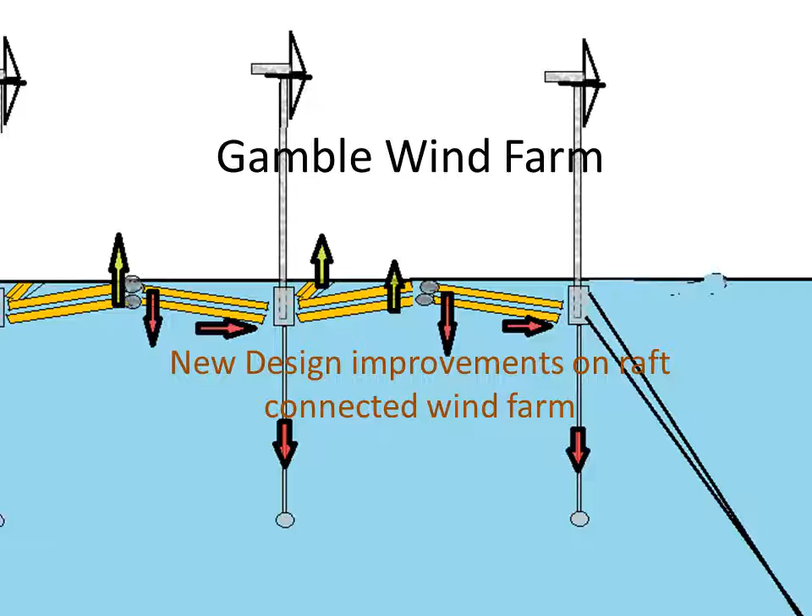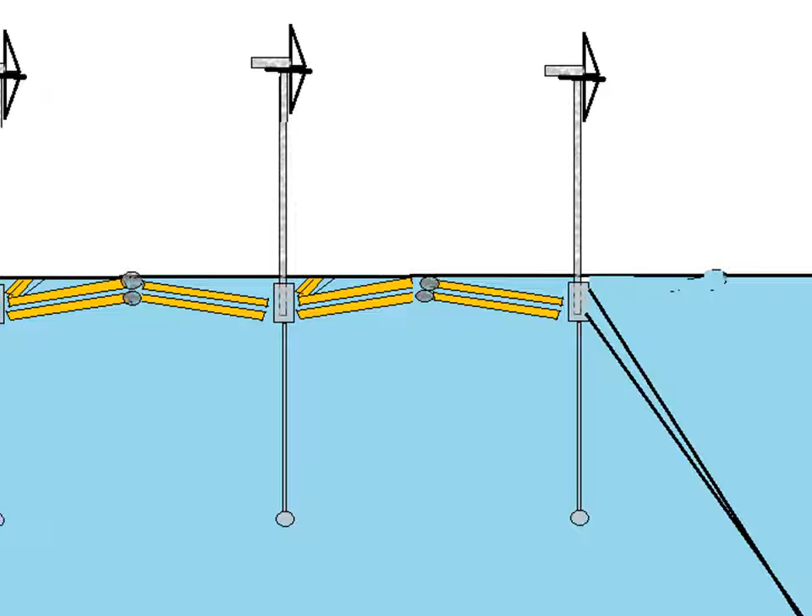Now, what this is based off of is the idea of really elongated buoys, and that's what those yellow bits there are, that are basically able to bend in the middle and in certain parts to move the mechanical shake in different directions. Now, the size of the buoys is based off of calculations I made that were in the last floating wind farm film that was released only about maybe a week ago.

Basically, seawater is 1/6 as heavy as steel, and polystyrene is 1 ton lighter than seawater per cubic meter. So what you have here is the ratio of cubic meters of polystyrene that it would take to equal 1 cubic meter of steel. And I've got this for the theoretical 10 megawatt range of towers, which don't actually exist yet, but I'm looking at the ahead engineering here.

It says that basically the leg joints of this would have to be about 42.25 meters is what I estimated for the length. And so therefore, if you're to get the correct amount of buoyancy that you'd need to the amount of steel for the 10 megawatt range, you would need a buoy that is roughly 42.25 meters long. And there are 6 of these on the design. I could show you later. And 2.25 by 2.25 meters height and width. And that would equal out enough polystyrene with the scheme to actually load this out and make it so that it would equal out in buoyancy.

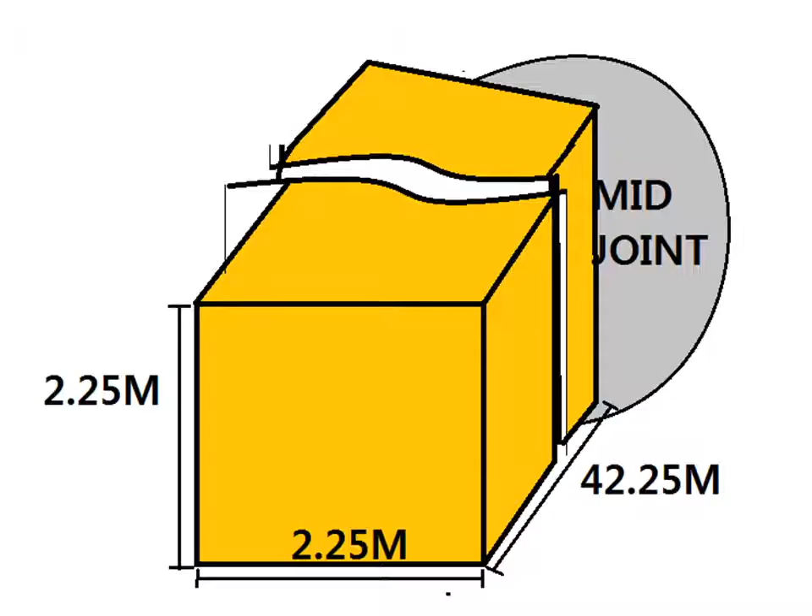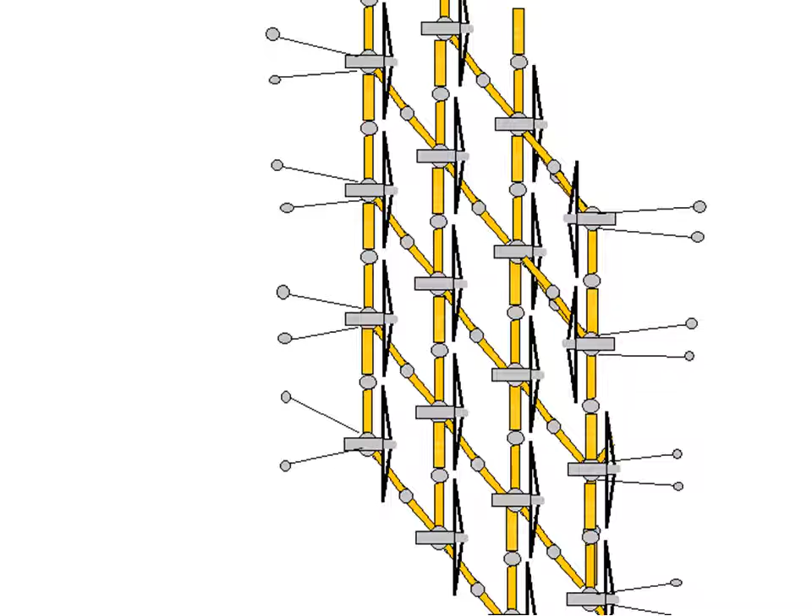This is more or less just to show you how that would look. There's a cut mark in the middle of it. And to give you a close-up view, this isn't everything about the buoys, but this is just giving you an idea of the size that it would take to do 10 megawatts by 10 megawatts. Now this system is a lot like the floating raft system that I was talking about in the last one. I don't have it quite done, I haven't figured out everything mechanically you'd have to do, but this is sort of an overview of how it would look.

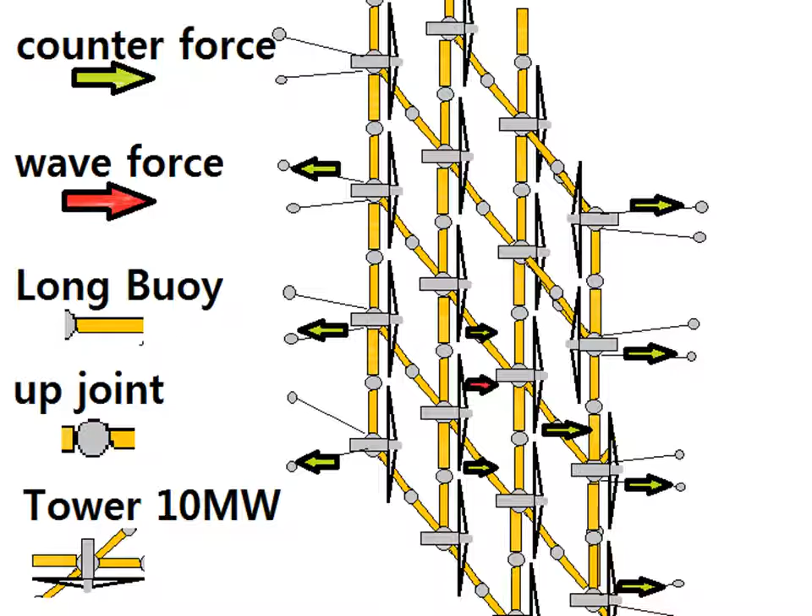Now, the thing about this is that any tension on one part of this tower system is going to try to force the joints down and around, which the joints of the buoy system are already in tension. They're in floating up tension. So basically, anytime the tower moves, it tries to move the buoys, which are already in tension against it. So it's trying to move thousands of pounds or tons instead of free floating. And this is a breakdown of basically the key that I have for this at the moment.

See, this is an example of what I was talking about. Now, if you look at this, I have in red sort of the forces of weight from the towers, and in green the counterforce of the buoys. And the buoys, once they go away from the towers, want to lean up. So therefore, to have those buoys go down on both sides would mean that you're countering the buoyancy force of the buoys. Now, you'll still need masts in this case, and you'll need them on the outside to make an absolute limit for how far the buoys can wander.

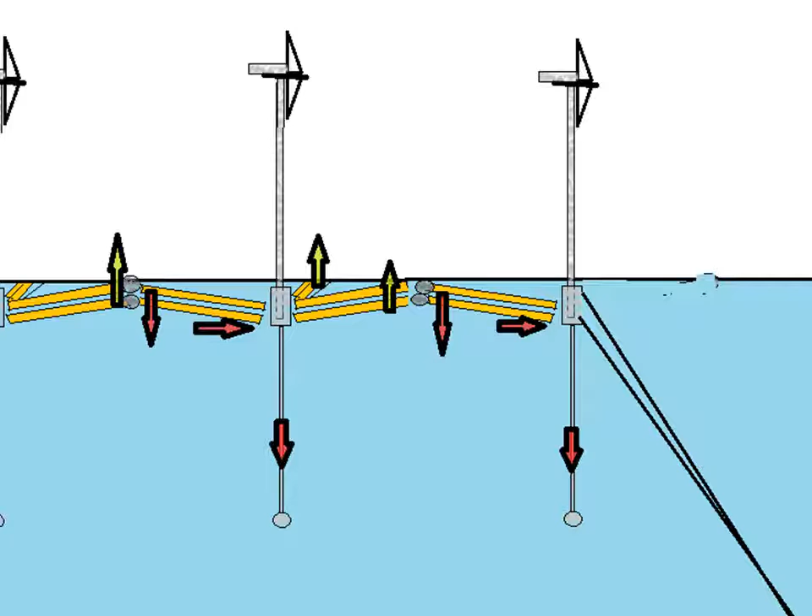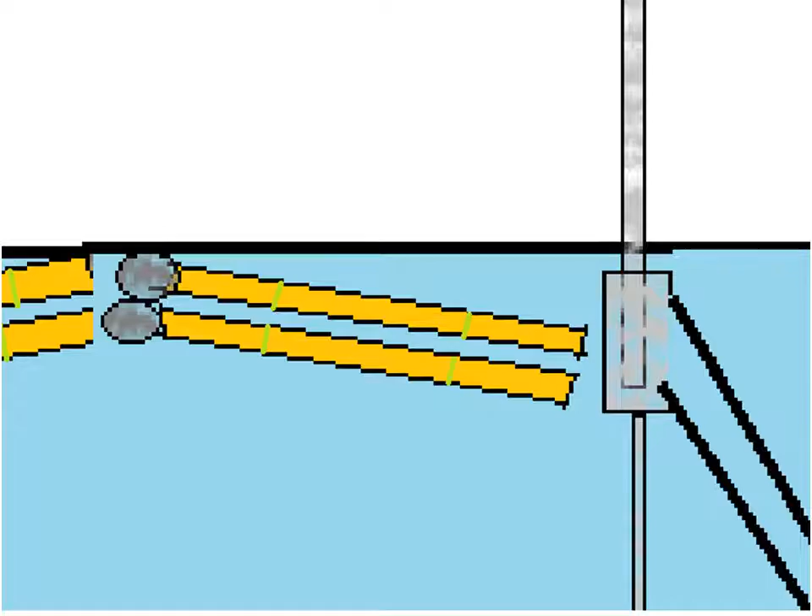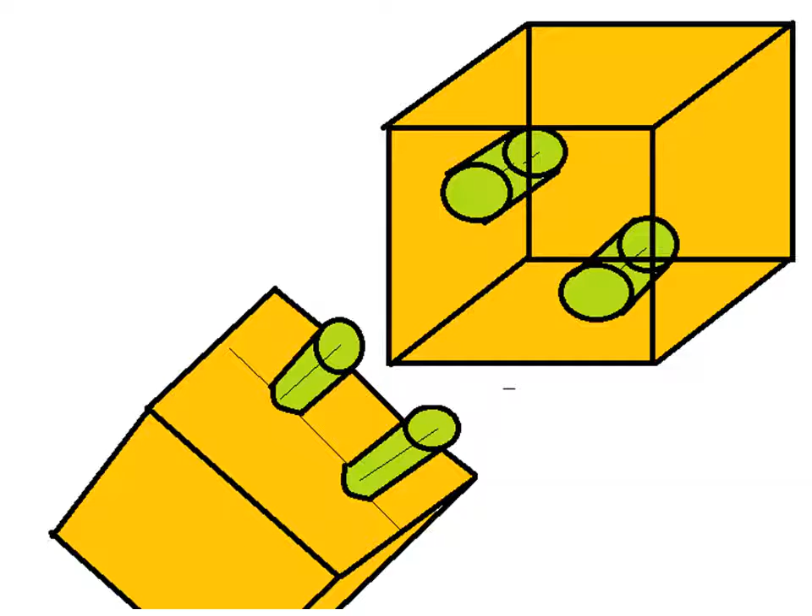But on top of that, the more important part, I think, is that you could use these buoys as sort of a mechanical shock absorber if you have it set up right. These little green marks here are really more supposed to represent the idea of there being a stoppage in the buoy system where it becomes more of a flow mechanics machine. Like you just have pegs that connect them so they can move slightly. The idea is more like you mechanically create a space where you're using water flow in and out of, and this different type of joint you could make. None of these have really been tested yet. These are all just kind of ideas at this point.

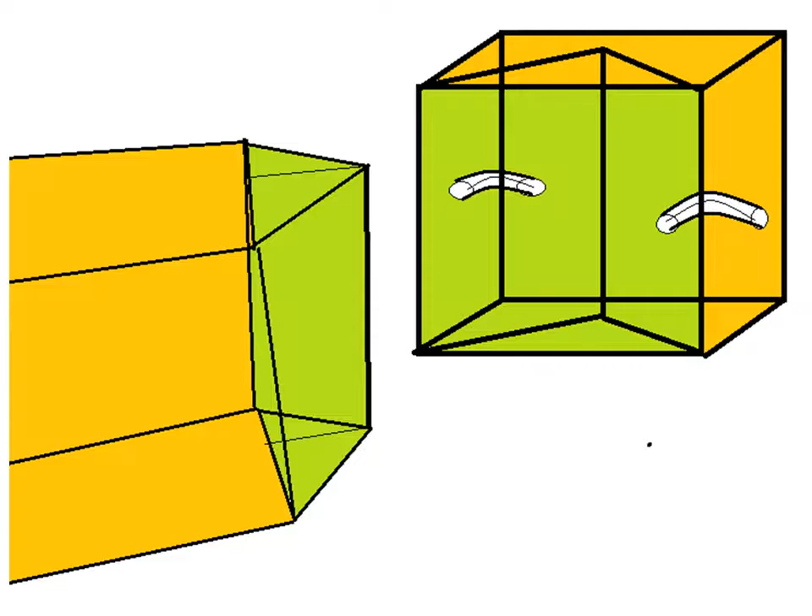But you can use water, forcing water in and out of the joint mechanically, to become a better buffer zone and create a loose joint in one place where you want it to shake, and make it so that the towers, which in this model don't have any buoyancy and therefore have less mechanical shake because they're not carried by the waves, help mitigate that shock from the wave. So this is another concept. You could just make a really elongated piece and have it shake up and down and move water out that way and create sort of a small pump system.

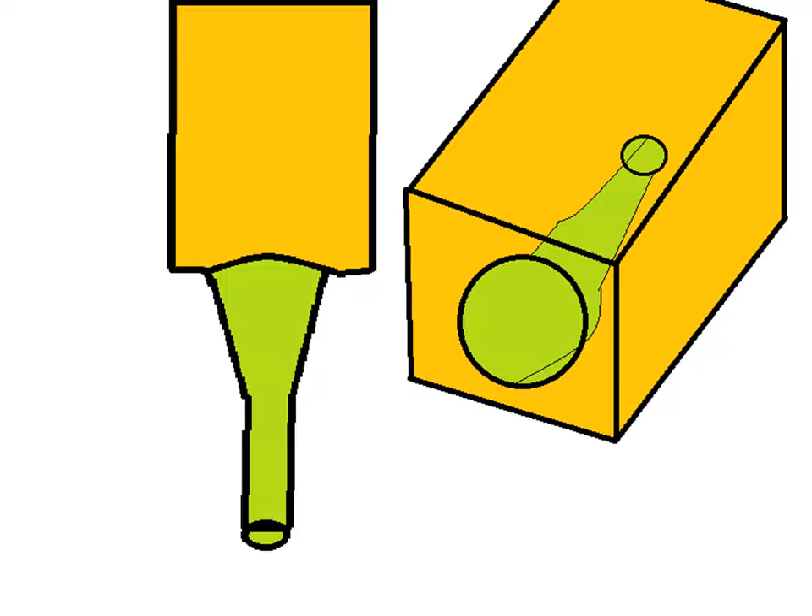And all of this is going to have to be connected with cable, which is one of the things not pictured in this. There's probably going to be a video later that explains more of the ins and outs of how that would work. But basically, just consider that there's a long cable running through these buoy systems that connects the buoy system to the tower. For right now, I don't know if that's a definite design detail, but could be. There's a lot of ways to skin a cat.

And this idea only came to me maybe 4 or 5 days ago, or a little less than that, 3 or so days ago maybe. And I'm gonna keep working on it. I've got some people who will let me use their AutoCAD system, and maybe even access to a wave machine pretty soon. I think it would be pretty easy actually to make a working model of this, and that's one thing I'm gonna go after as I refine this.

Well, I hope if anybody saw the other video with the other type of raft system, you understand that it's a moving design. A lot of people said that they just thought that the material cost was way too much. And so this is my attempt at getting the material costs down for a system that would never actually have to touch the surface of the seafloor.